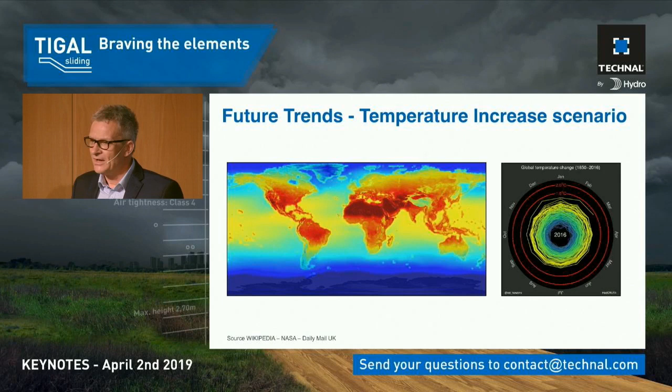This is caused by CO2 emissions. Today we discuss a CO2 level in city centers of 400 parts per million. This 400 will double within the next 30 years. We are facing in 2050 double as much CO2 in our atmosphere, and CO2 is the greenhouse gas, which means it's heating up planet Earth. Lucky us, more than 90% of this heat is swallowed by the oceans around the globe.

But here the next risks come onto the scene. An ocean which becomes hotter than 27 degrees Celsius develops many more hurricanes, many more typhoons, much more rain, many more problems for people along the coastlines. Reflect on what I've said about where the population growth might happen. It is mostly Indonesia, it is mostly the US, it is Africa.

Then you have the water temperature increasing, and on the left-hand side picture, every area on the ocean which is yellow will become during summertime hotter than 27 degrees Celsius. So in all these regions, you have an increased risk of typhoons, hurricanes, and whatever could happen.

The next question, of course, is you have the growth of population, taller buildings, you have the climate change. What happens? And you see it immediately when you just look at all the hurricanes occurring already in the past years. Around the coastlines, we will have the biggest issues on high wind loads and high rain requests.

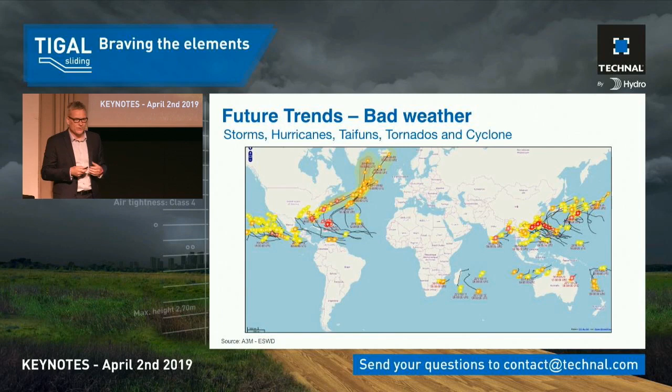But it does not happen in Europe. I mean, in Barcelona, in Germany, we are safe. No problem with hurricanes. Why should we care for anything like that? I brought with me a picture from the European Severe Storms Laboratory. And these are all the tornadoes of the past 8 years in Europe.

We have tornadoes from the classification F0, F1 until F4. F1 is 180 kilometers per hour wind speed. F4 is more than 400 kilometers per hour wind speed on the curtain wall. And you see on that picture, which is pretty impressive, I feel myself, we had in 2010 one incident between France and Belgium where an F4 tornado occurred.

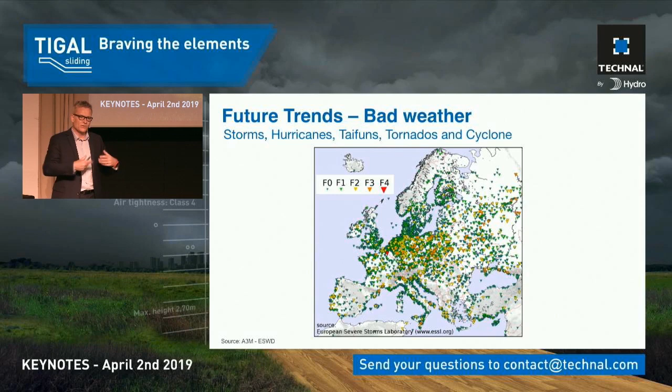An F4 tornado makes a pressure as if 11 people would stand on a plot 1 by 1 meter. 11 people. Roughly 800 kilograms per square meter wind pressure on the curtain wall. So tornadoes also happen here. We also go high-rise, so we also have to take care with our constructions that the wind loads can be swallowed by having static, stable constructions in parallel. So being responsive to wind loads as well.

These are the macro climate issues. Climate change due to CO2 emissions. On the other side, every city is special. Barcelona is different than Paris, Paris is different than maybe Munich, and so on and so forth. I brought with me a picture of the city of Paris.

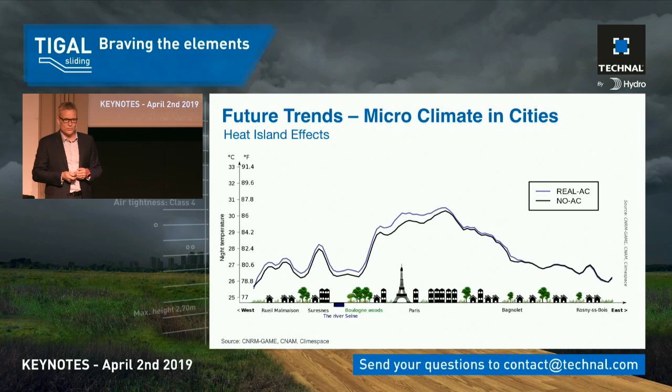Because when we can use natural ventilation in cities, we don't have to switch on air conditioning devices, which are heating up the cities in addition. So let's try to find out what Tigal by Technal can really deliver in that way of natural ventilation. And I'm happy also for the colleagues in Singapore that Singapore has also made this kind of simulation. What could be done in Singapore to reduce temperatures during the summer period, during the winter period?

And they have made a study: if I really green all the streets, if I green in addition my buildings, the temperature in Singapore could come down 2 degrees Celsius, cooling down the city climate, making the city centers much more livable for the people living there, but also by this reducing demand for cooling, because it's 2 degrees less hot outside than without this kind of measures.

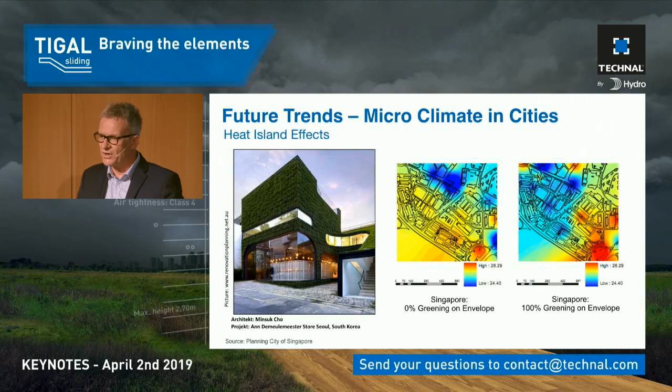So it's feasible, it's possible, but the microclimate, the greening, is just one part. You have to get rid of residues, you have to get rid of fine dust particles coming from the traffic, from the truck traffic, from the heating devices. So ventilation of the city centers is a real issue.

The ventilation of the city centers is a must, because by having a free flow of air, not obstructed by the coming high-rise buildings, but allowing even more ventilation of the city centers, gives much more advantages to get rid of residues, cool down the city during the evening time, and also enabling by this natural ventilation even for high-rise buildings. But this kind of free wind flows also means pressure fields at the curtain wall areas, which means a stiffer construction is needed to answer during storms and hurricanes these kind of requests.

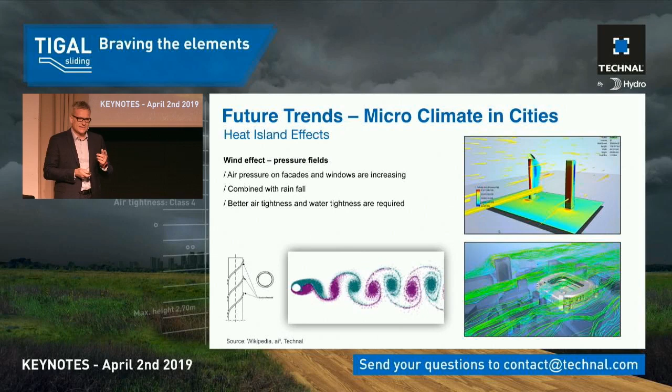The city of Vienna is a pretty good example of how they really did it. The city of Vienna has for 5 years had a project ongoing where, in the main direction of the wind flows, they plant new plants, new trees, and new greenery at the houses to cool down the city, to clean the air of the city from fine dust particles, but also to enable free flow of wind.

Vienna is an old city. The plot is coming from the medieval time. But when you look on the plot of Vienna, the streets follow only one direction. The main roads go straight in the parallel direction to the wind forces, to the wind loads. And the same building plot was done for Paris and for the other medieval towns. The old architects knew pretty well what to do to get rid of the heat of the city and also of residues.

When we have the microclimate, we have the wind speeds. We have on the other side, of course, the devices which are heating up. And sun radiation could be for good and for bad in city centers. It also depends on the surface you have chosen. When we have concave surfaces, the sun radiation is straightly reflected into the city centers, heating up those areas by 10, 20, in some areas, like London, we have seen a project more than 50 degrees.

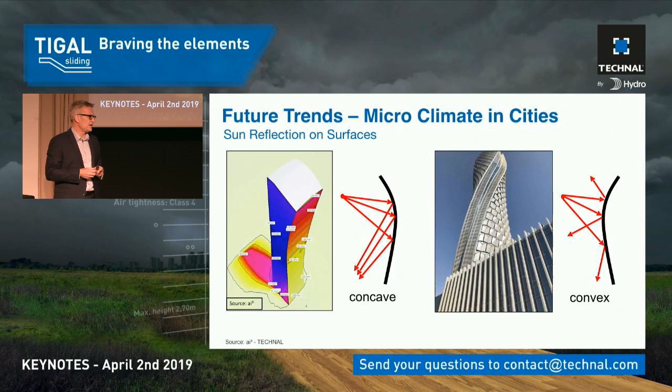What is correct for the daylight is also correct for sound. Because when we have a sound issue in the city centers, it is mainly enhanced and increasing when we have high-rise buildings. In the street canyons of today, we have hard surfaces, glass surfaces, and the sound in between is reflecting multiple times. And by this, the increase of the sound in city centers is more than 3 dB. What is 3 dB? The difference between 1 car passing your building or 2 cars passing your building. So this is something we have also to reflect.

We have an increase of sound. We have to take care with Tigal by Technal also when it's closed to protect the people inside against the sound from outside. This is something which is definitely important. And then for the architects and the urban planners, something more could come into the scene. And this you see in the lower right bottom area. If you make the surface of a building absorb the sound, diffusely reflect the sound, you can lower the sound in city centers by 8 to 10 dB, which means the impression for you as a person is as if the sound is just half compared to beforehand.

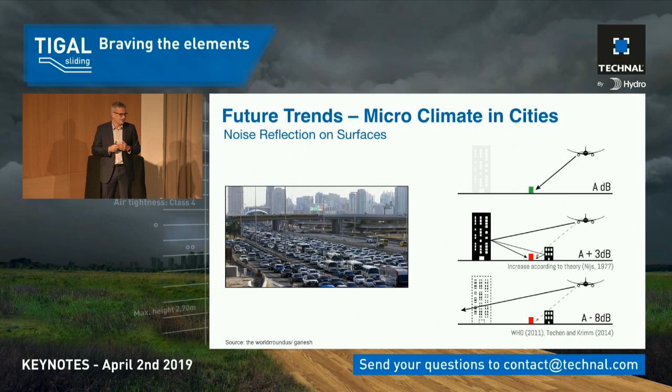And how do you achieve this? Of course, by convex solutions, could be like that, but making projections with balconies, with terraces has the same effect. So these kinds of building shapes influence not only the overheating in the microclimate, but also the sound experience in city centers. And this is a really, really good chance and challenge for the architects to design something like that in the future.

What will the future buildings look like? Will they be office buildings? Will they be just residential buildings?

Will it be a mixed use? We think it will be a mixed use, because what we plan today as residential could become an office tomorrow, and the day after a grocery store might enter. So whatever we do with our construction, we must be flexible, adaptable to the society and also to the development of the renting plot. And this is something we really want to see.

And what you see on that chart on the left-hand side is all the tall buildings realized above 200 meters during the last years. So we grow higher, and we have more than 100 high-rise buildings above 200 meters already ready to use, which is pretty important to know. And in addition, with the plots on the lower right-hand side, you see a lot of these buildings have been along the coastlines of China, India, Indonesia, US West Coast, US East Coast, where we have the hurricanes and the typhoon classes to come.

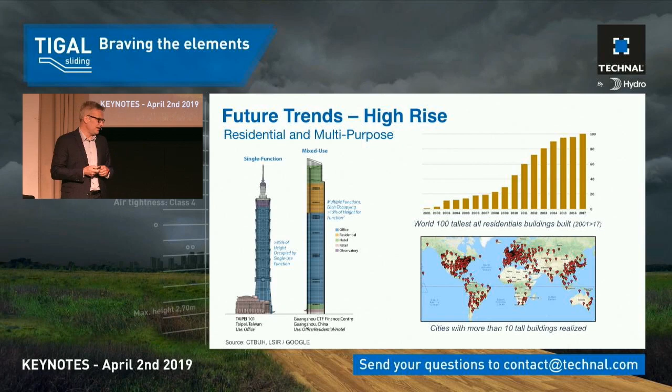Important as well: is it possible to make it? Did we already do it like that? And this is the next plot I would just try to focus on. At the moment, 1 square meter of building ground in Hong Kong costs you 90,000 euros. 1 square meter. In Paris, it's a little bit less costly. It's 40,000 euros, I mean, 1 square meter of ground you want to build your house. So it's clear it will not be a one flat residential building in Paris built any longer.

In addition, interesting for that chart as well is, in London, the flat on average costs you 6,000 to 7,000 euros a month. And normally you should rent that flat for 48 years before you can call it yours. Okay, so it's a long-term investment these days in London if you want to have this kind of flats installed. So price is pretty important.

To summarize, buildings get taller, but with the taller buildings, we get more opportunities as architects and as planners because the surface of the envelope increases. We can harvest energy. We can clean the air. We can absorb the sound. We can bring daylight into the buildings. We can allow natural ventilation coming into the buildings, reducing air conditioning needs. All this is feasible, and with the new solutions, we have to answer this kind of demands and requests.

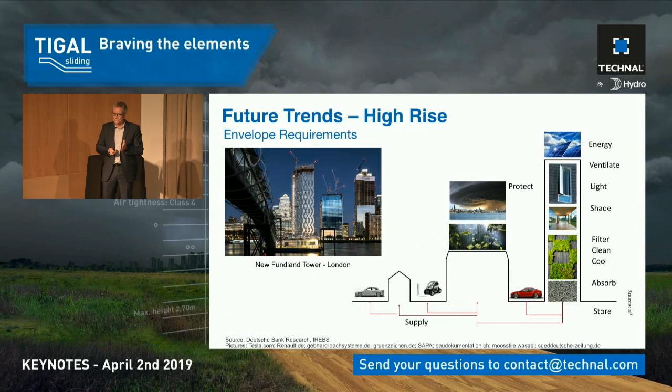The next question we are raising, also when it comes to the design brief, when it comes to the buildings: how will they really be in the future? And there's a pretty nice project in Copenhagen planned by the architects. The idea of the architects is we want to be so flexible that I don't care whether it is a residential, an office, or a grocery store area. Everything should be possible at the same time by using the same design, the same outer curtain wall.

Why do I say that? When you have the opening and closing of a device, you must test. In residential, you test normally 10,000 cycles, opening and closing. For commercial, you test 20,000 opening and closing cycles. We in Technal did 25,000 opening and closing cycles with the best performing solution. So we did even more just to enable wherever you build it, it could be residential, it could be commercial, it could be a grocery store. Regardless of the use, you can use it like that.

In addition, this concept for the architects in Copenhagen is pretty interesting because they want to use 40% recycled concrete. They don't want to pour fresh concrete, they want to use old concrete, redo it again, and put it into the construction as well. So think about recyclability.

Reuse of material is something very, very important to us. In Tigal, for instance, 70% of all the materials are recyclable. And due to the cradle-to-cradle certification, we removed all PVC content in our structure. So also we took this plot from the architects.

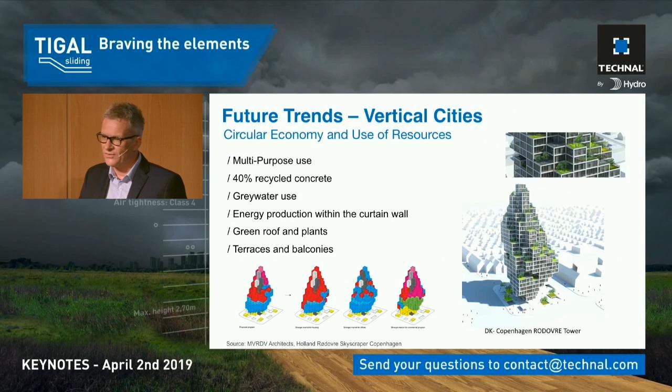What they in addition do, of course, is produce energy on site. They become autonomous with the energy demand. They take care of the gray water consumption. They also, in addition, want to have terraces, but also rooftops greened to reduce temperatures in city centers, but also allowing more comfort for the people inside.

So the concept is not a single one in Copenhagen. You see a lot of projects around the globe exactly with the same plot, with the same principle of idea, taking care of the nature, taking care of the use of what you already can harvest on site as well.

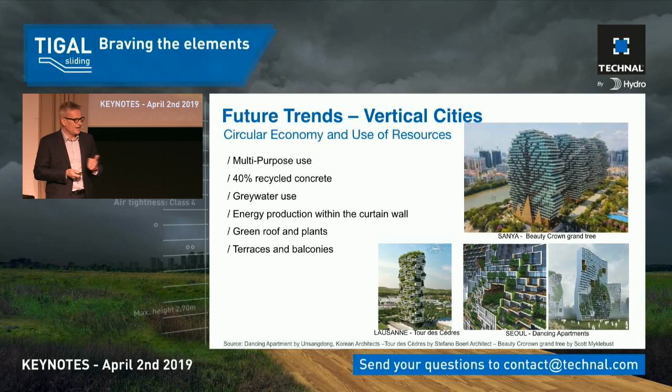In this context, I also would like to remind all of us, I guess you know it by heart, I'm pretty sure, in Europe, in 2020, so next year, there is a request from the European Union that 50% of all our waste has to be taken back and recycled, making something new out of it. At the moment, we have an average of around 39% overall in Europe, where we have some areas like Germany and Austria at more than 60%, and others close to 60%.

And even so important for all of us in most of our countries is, what about the jobs? In 7 years, in this area, to treat waste in a proper way, the jobs have increased more than 40%. So it will become also a kind of job machine in the future to think in recycling, to think in the use of urban mining.

Urban mining, a pretty important thing. Today, already 200,000 tons of aluminium are installed in buildings worldwide. 200,000 tons of aluminium from 40 years ago, 30 years ago, these tons are now coming back. So it would be the best thing to reuse old windows, recycle them, and bring new windows into the market. We'll have a solution to that also for Tigal. I will show you a little bit later.

To summarize what we need for the Tigal launch, but also for the design brief, in short, it has to be resistant to heavy rain. It has to be resistant to heavy storm and wind loads. It has to answer the question, how do we keep the heat outside? How do we keep the cold outside to save energy at the inside? Also, we have to take care about smog, about dust, fine particles in the air of cities. So a very, very tight construction is a must for all of us.

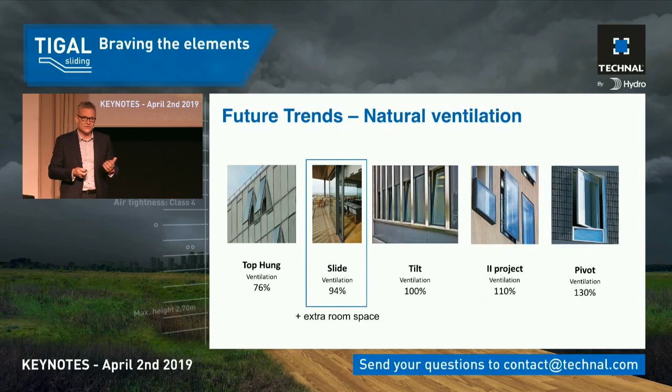But on the other side, also for the high-rise towers, it does not really make too much sense to stay with a window when you can have a solution like a slider. And for the ventilation, of course, a slider also has some advantages compared to the top-hung open-out solution. So the best compromise for the design brief was to go for a kind of sliding solution with the performances of a window, allowing maximum natural ventilation, but having the tightness of a window construction as well. So we went into this kind of design brief. Let's have the first glance, the first look on Tigal by Technal now.

We have the scheme A already developed. It is one fixed area, it is one movable part. And the pretty interesting thing here is, normally you have a slider. A slider is a lift and slide, just a slide. Here it's projecting in parallel to the inside, and then you can slide.

This allows you to have no gaskets at the frame in the opening position any longer, so it's extremely easy to move the sash without too much force. And in addition, by having the construction like a window, it is as tight as a window. It is 4 times more tight than a slider construction. This was part of the design brief we have made, and I guess this example shows you the first glimpse of the product we want to show you later.

In addition, when we see braving the elements even further, let's go into the technical details. I'm a German engineer, so I always have to come back to this one. Standards, we love standards in Germany. So we have a classification on water tightness E1200. It doesn't mean anything to most of us. What is 1200? It's 1200 Pascal. It means the wind pressure is 120 kilogram per square meter. This is pressure of more than an F1 tornado.

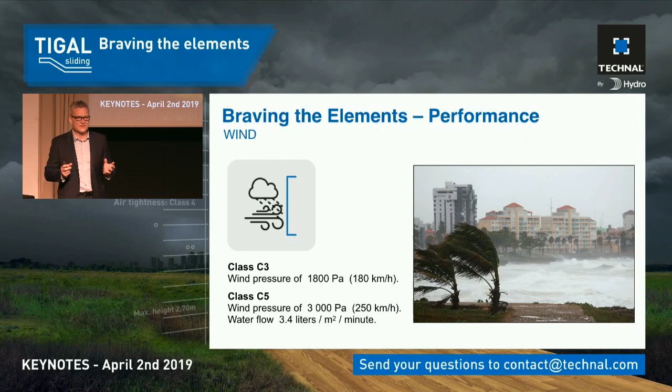We have 2 options. The one is we can reach F2 tornadoes with a C3 classification, but we can even go higher. We can go up to 3,000 Pascal or 300 kilograms of weight per square meter pressure, and here we also combined it with almost double as much water. Those who are not only in the European standards realize immediately 3.4 liters per minute and square meter is the ASTM standard. So our aim is, of course, to have an international appearance of this solution, being tight in all of our applications worldwide. Very important for all of us to have this kind of opportunities delivered.

The next one is, of course, when we want to go to city centers, it is traffic, it is sound outside. The sound insulation with 45 dB is as good as an ordinary turn and tilt window. 45, and if you go for the traffic rated, it's still 40 dB. Which means when you live in a city center and you have a lot of traffic outside, you close the door, you close the window slider, you hear almost nothing from the outside. So easy to live and easy to sleep with a lot of comfort inside.

The next challenge we have faced is how do we cope with the increase of temperature around the globe and the cooling demands. The construction we have chosen ranges from the non-insulated to the passive house solution. So you can even go straight to passive house requests with that kind of new window slider, Tigal by Technal, answering the overheating, heat increase, but also more weather extremes during the winter period.

And let's share together a pretty good video showing you a little bit the details of the slider construction to give us more insight about the technical engineering done by the colleagues in Toulouse, making that happen during the quest over the last 3 years with a lot of ups, not too much other things, but a lot of learnings on that one.

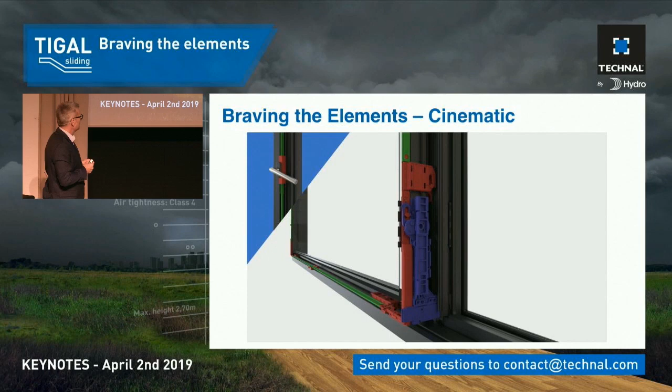It's a patented bulkhead solution, which is really closing off the area where water is penetrating and where it should be tight. And this is a pretty interesting part of it. And please remember the shape of the hook. I will come back to this a little bit later. And you see the hooking device gives us the opportunity to have microventilation, but in addition also, of course, complete parallel moving away from the structure.

We can swallow up to 300 kg, 2 meters times 2.7 meters. But now let's listen to the sound.

And this sound is a simulated sound. Outside, you have 75 to 80 dB sound, and this is the real performance of the slider we have measured in our test chambers. So this is the experience you will have if you install the Tigal by Technal into your buildings, into your project plots.

The next one is the acoustics. As said, 45 dB is a must, but even more important is good acoustics in combination with the possibility to reduce air conditioning, and this means ventilation purposes. When you have a slider today, you open the slider, you have a small gap. According to the gap, you get more and more air in, but unfortunately, you might also get people in you don't want to have.

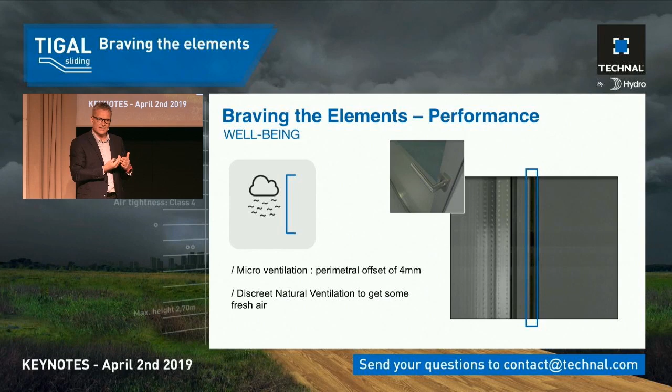And this is something you should really consider to lower the climatic loads inside the building, and by this reducing the air conditioning needs and helping Paris to get cooler during summer periods, for instance. When it comes to the security, we have already done the RC2 testing. RC2 means a professional burglar tries for 3 minutes to enter. The professional burglars have not been successful because we have reached the RC2 classification.

Then the next one we have to consider, you remember the first pages, I'm pretty sure. 1 person out of 5 in 2050 will be older than 60. 500 million people will be older than 80. So easy access is a must for all the designs. And in the Tigal by Technal, we just have a minimalistic threshold of 15 millimeters, allowing easy access without stumbling going to the inside.

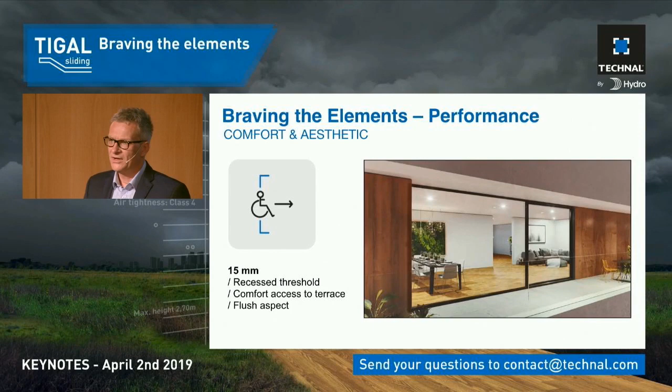To summarize a little bit, we try to do a little bit more than just good design. We want to be as sleek in the design as possible, as minimalistic on the frame as possible, as transparent as we could even reach. You have a choice between visible and concealed sash. You have the choice between visible and concealed drainage, but you have in addition a complete concealed fitting solution, which is also giving more aesthetics to the architecture of the building from the outside and from the inside.

To summarize in brief in a cross-section, the complete depth of Tigal by Technal is 150 millimeters. The infill thickness maximum is 53 millimeters, and the sash has 71 millimeters. In addition, we have thought about the concealed, completely invisible mechanism in between, but also we have the choice with and without connecting to the structure profiles. We call it BTC grooves, and this is something where we are not only designing a solution in Technal, we are also designing a proper installation phase.

This is our aim, and of course you have opportunities for the hidden and the visible drainage, and we have a lot of space to the outside. Just imagine what you want to do there. You can put in balustrades, glass balconies, you can put in LED lights, for instance, for having a media facade during the nighttime, or you put in fly screens. So there are a lot of opportunities to be more creative in the coming projects than we have thought so far.

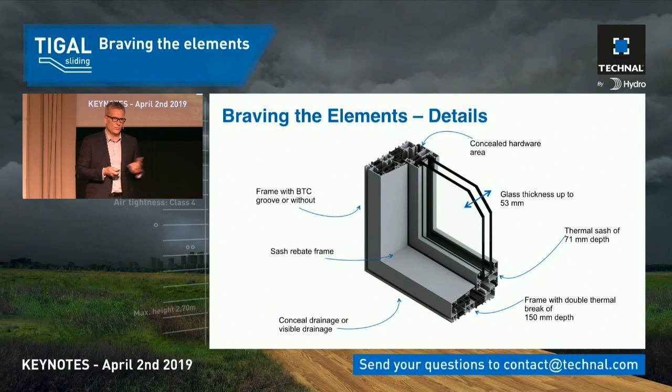As I said, you have the hidden and you have the visible sash. The hidden sash gives you the opportunity to increase the transparency up to 98%.

So only the middle mullion will stay visible for the architecture, for the users at the inside. And in addition, this kind of concealed sash has one more technical advantage. It is hiding completely the outer area of the sash, and by this reducing the bi-metal effect. So it's even easier to operate that slider during the summer periods. It's also a request coming out of the design brief.

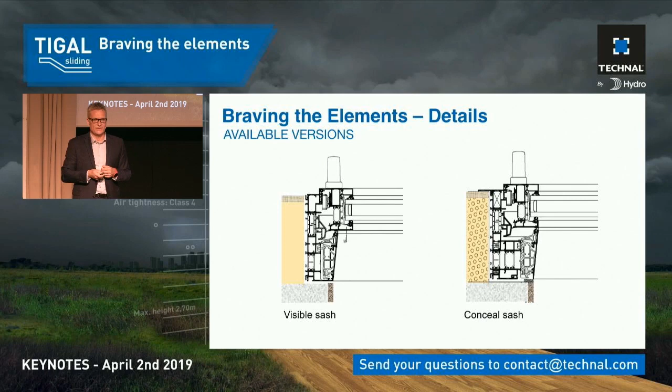You have it in non-insulated and in insulated because it's a product for around the globe where you have different conditions, where you have different requests, but no hassle. If you have done it once, the other one is exactly the same. We are using the same articles, the same fabrication procedures, the same installation procedures. Everything is exactly the same. So you can have two options, thermally broken, non-thermally broken. And just remind yourself, you can go in the thermally broken down to passive house level.

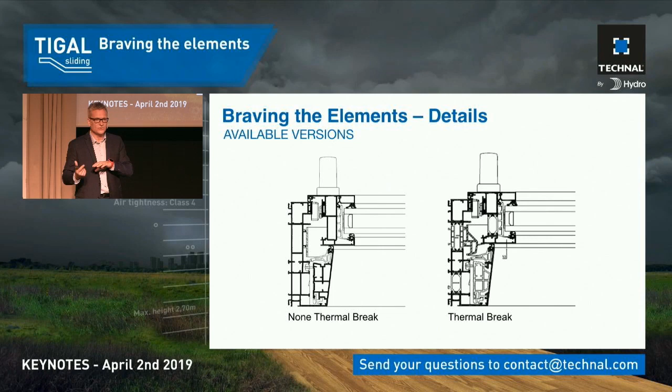About the schemes at the moment already available: it is scheme A, one fixed field, one openable going to the inside, and this you can have on the right and the left-hand side. And we call it scheme K, which means you have a big fixed field in the middle and you have two openable sashes moving here, giving you a lot of opportunities to access balconies, terraces, and a lot of transparency when you have, for instance, your living room or your offices with a lot of natural light coming in there.

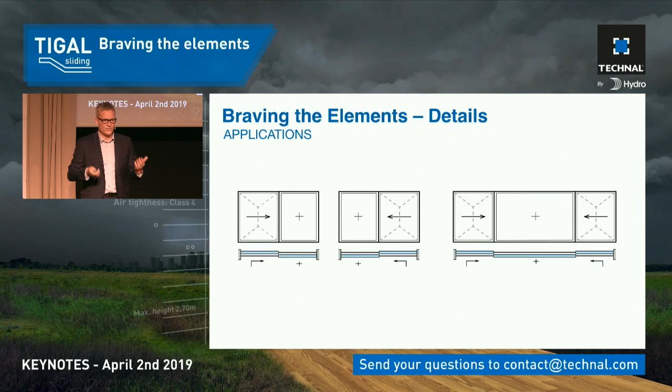You should really make the test by yourself. It is easy to move. It is without any hassle. Anyone can open it, and remind yourself with the slider construction and the bi-metal of today, what kind of forces you might use today. And here it is just with a finger possible.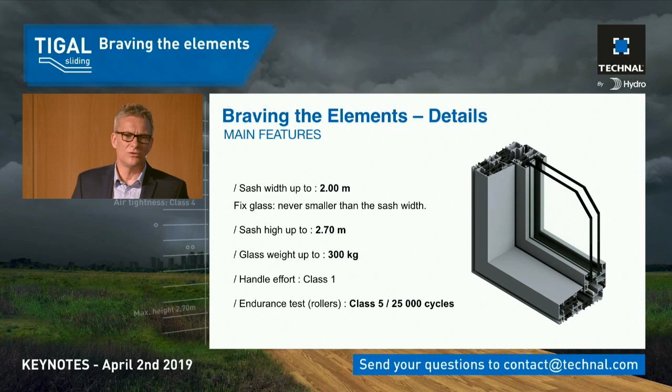This is Tigal when it comes to the genes, when it comes to the design details, when it comes to how to answer the brief we have tried to forecast in the past 3 years. But then also a heritage from the Hydro organization showed us the way. You mentioned 2020, Hydro wants to become CO2 neutral. This we reach with a Tigal solution with 2 options.

Today, if you buy an aluminum window, 1 kilogram of aluminum causes 9 kilogram of CO2 emissions. If the production of aluminum is even in coal-fired areas, it goes up to 20 kilogram of CO2 emissions. Okay? We have 2 new materials in Tigal by Technal. We use a 4.0, which is a primary aluminum, made almost 100% water-powered in Norway, reducing from 9 kilogram to 4 kilogram of CO2 emissions.

And we have another one which is taking care of the circular economy of the urban mining, which is 2.0, which is a completely recycled metal. This metal has already been a window 40 years ago, and it's called infinite aluminium, and it has an average of just 2 kilograms of CO2 emissions. What is 2 kilograms? What is 9 kilograms? What is 20? When you have a curtain wall, roughly around 10,000 square meters, you have approximately 100 tons of aluminum in there. So it's the choice of the planner.

Coal-fired, it is 2,000 tons of CO2 emissions. 75, in this case, infinite aluminium, it is 200 tons of CO2 emissions. And do you know how long a tree must grow to swallow 1 ton of CO2? 80 years. Remind the 80 again, huh? 80 years, 1 tree needs to absorb 1 ton of CO2 emissions. So there's a lot to do to become more aware as a society, to become more aware of the climate changes.

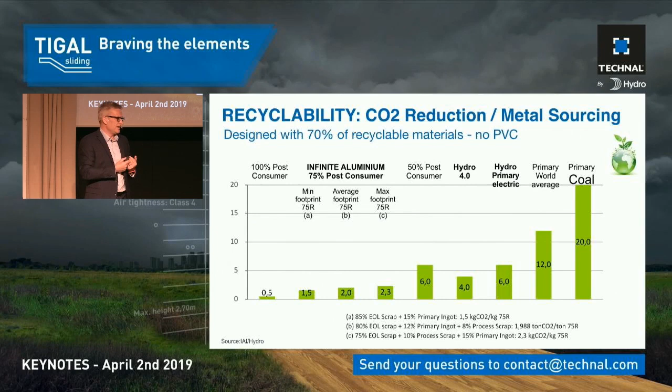Minimizing CO2 emission is a must for us in Hydro and especially for us in Technal. And Tigal by Technal is the first solution. We really want to go into this CO2 reduced aluminium materiality, and you will see a presentation later on just on that topic.

It was a pleasure and honor to me to give you a little bit of background information about the thinking of the engineers, about the design brief, and everything which tried to influence us to make a proper solution of a window slider which takes the comfort of a slider construction and combines it with the performances of a window solution, for the best in city centers. So let's watch out. I have one more video on that one. And please remind, 80 could be a good figure of the future.